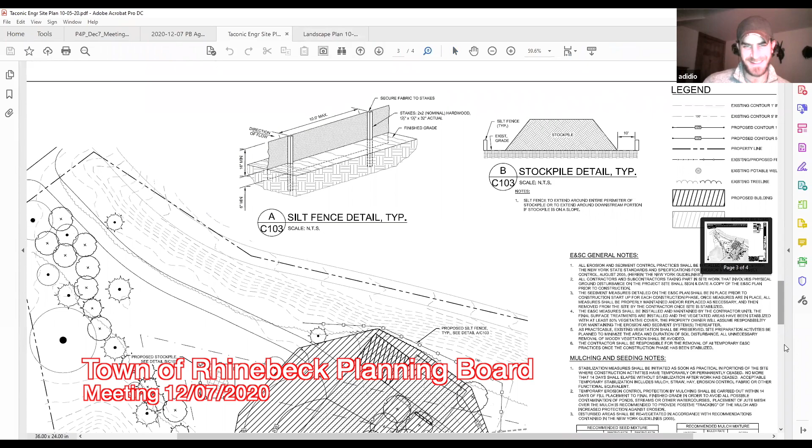I think this is the old site plan because it still shows the old one. Yeah, this is the old one I think. The new one will have a revision date of 11/20. Okay, well I know that was sent out to us. I believe we've all had an opportunity to see the new one, because I know you did send that out. Yeah, it looked kind of sparse to me, that plan.

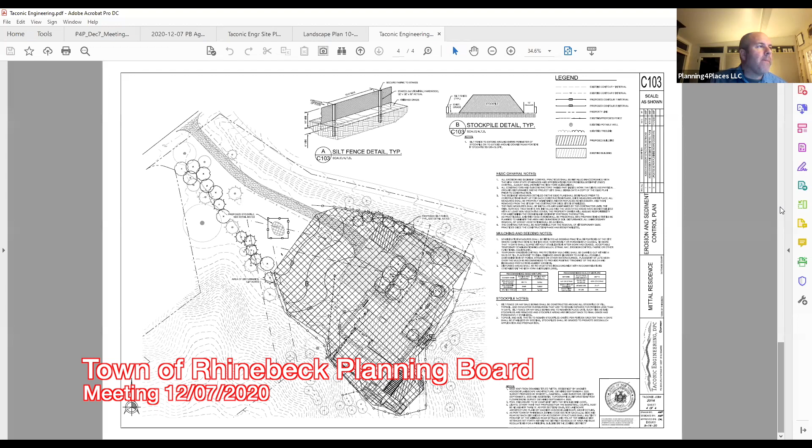Not sure. I have a couple files here. I can see if it's one of the other ones. Looks like it may have been submitted on or around the 23rd or 24th. I know it went to Ray Jurkowski on the 24th. Is this it? That is it. Yep, that's the new one. There it is, sorry about that.

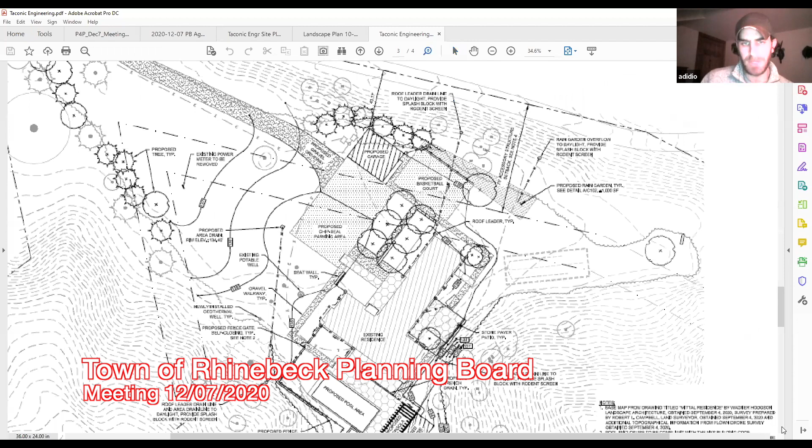No problem. So on this one specifically, you can see the barn or garage location with that shift gets it up on the flat, which the previous one did not appear to do. We're up on the flat with the garage now. You can see how it cut into the driveway parking court a little bit. Really, a shift any further would require a significant grade change and rerouting of the driveway.

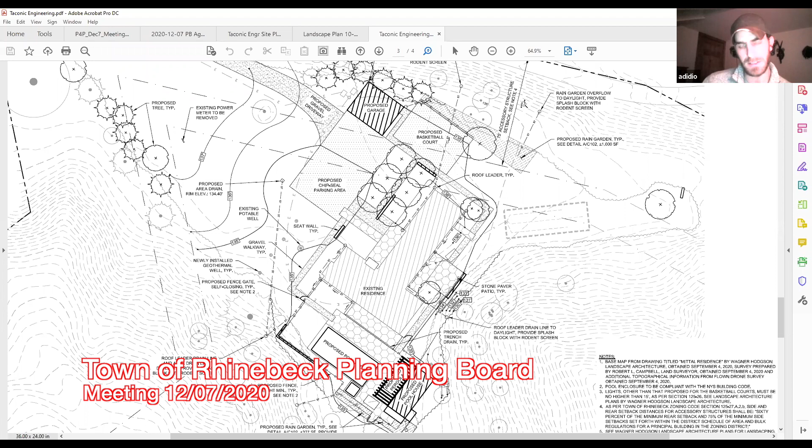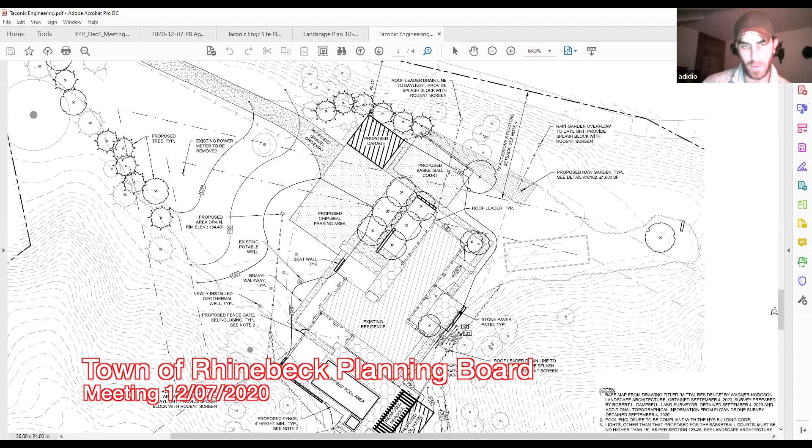On the north, behind the basketball court, there's a long strip of what will be rain garden area, just inside the tree line. There's a detail showing the ponding depth, sized to manage and house the entire 10-year storm, the full channel protection volume, which is in the neighborhood of 5 inches of rain in a 24-hour period. Then to the south, near the pool house, the rain garden is integrated into the plantings.

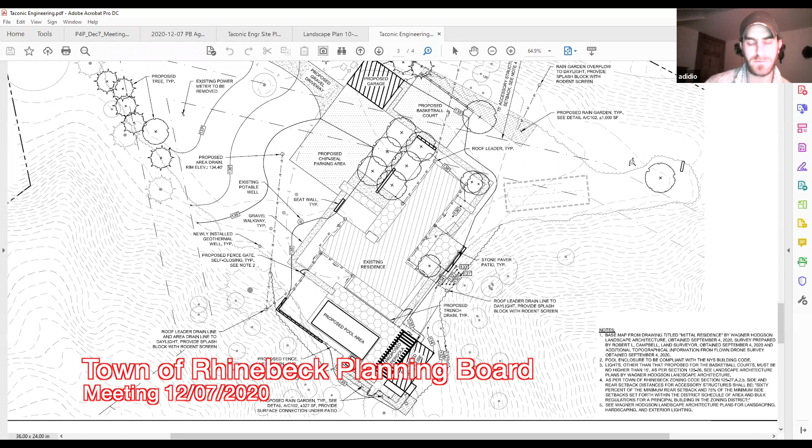Around the pool house patio area, it's almost a planted garden, but it'll act as the rain garden, so the roof leaders are directed there. There's a catch basin out front to allow water from the parking court area. Just to the west of that, near the corner of the parking court, there's a small yard drain that would daylight to the hillside. That's just standard site drainage.

From a site plan perspective, we updated our area of disturbance. Again, those roof leaders are shown, and the pool house. One minor thing, which Dale can chime in on, we did shift the spa, the proposed hot tub, to the pool. That was just a minor site change, no real implications otherwise.

Okay, any questions for Andy from members of the planning board?

I guess the only question I have, Andy, have you run this by Dave Pearson down at the Health Department so that he knows you've removed the bathroom from the pool house? I did, yeah. He and I had subsequent discussions about how the process would work if we tried to do it, thinking about various options, and we came to the conclusion that it just doesn't accommodate the water closet. So removing it, he said their involvement goes away because there's no exterior plumbing. We even talked about routing it through the house so we didn't need septic tanks and pump chambers, but he said any exterior plumbing modifications includes their involvement. So the applicant unfortunately decided they had to take it out. Okay, yeah, so Dave's on board.

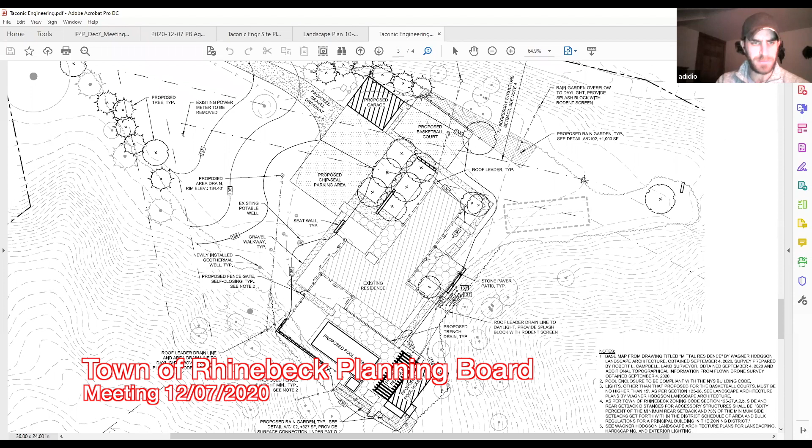Any other questions from members of the planning board? I don't know if you want to flip to the other items you were looking for, you could flip to the landscape plan. It's just updated commensurate to the site plan revisions. Yeah, well, let's have a look.

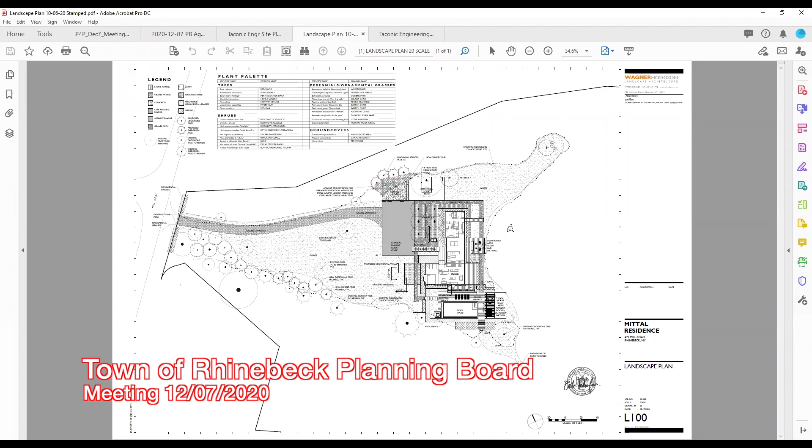Is that the right one? I don't think that's the right one. No, that's the older one.

Sorry, I have a whole bunch of files for you.

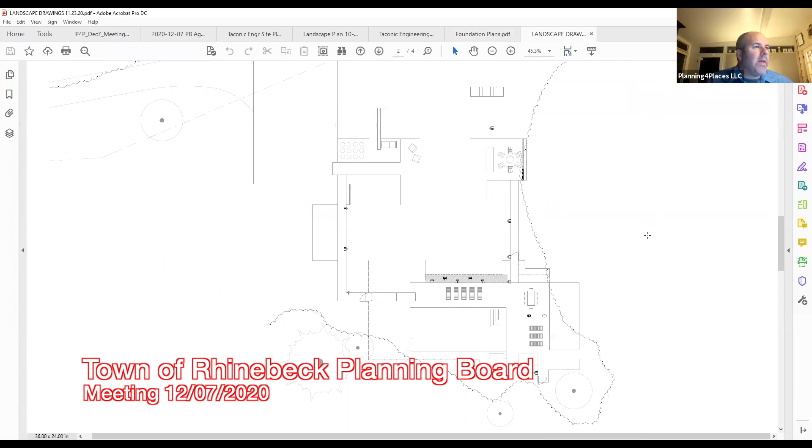Okay. All right, let's see. Excuse me, okay, I think I have the right set now. Is this the sheet, or a different one? That looks to be right. Correct.

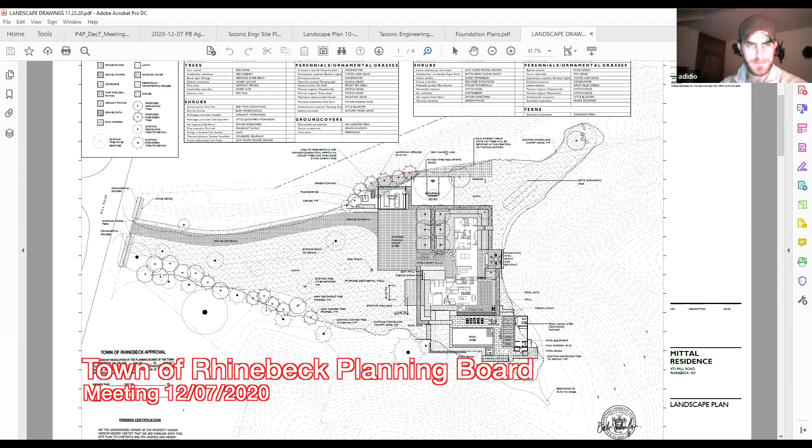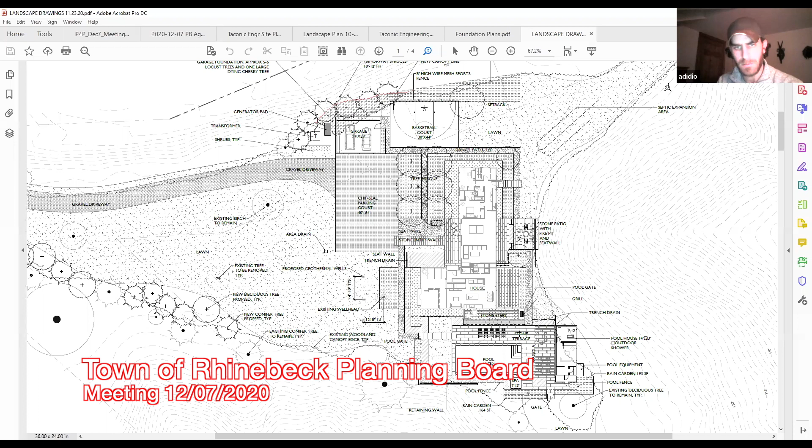Okay, yeah, this one says landscape plan. So this calls out the material selection and also shows the rain garden locations, some additional tree plantings on the backside of the garage, and it goes hand in hand with the site plan. It includes some of the drainage structures, like that catch basin out front, that sort of thing. So it's more about the surface and material selection than anything else.

Andy, it looks like it's still showing an outdoor shower on this plan. Let's see. Is that right? Am I misreading something? I'm not seeing that. Oh, right there with it.

It's the interior bathroom that we removed. We would still keep the outdoor shower. Okay, that's okay with the health department? Yes, that's my understanding. That wouldn't be plumbed to the septic or anything, so that's totally fine. It would be a rinsing shower—once you get out of the pool, it's not a lather-up soap shower. It's not unlike the outdoor showers you see at public pool facilities. It's just a rinse to get chlorine out of your hair, not an actual shower. It just runs over land, it's not a plumbed shower.

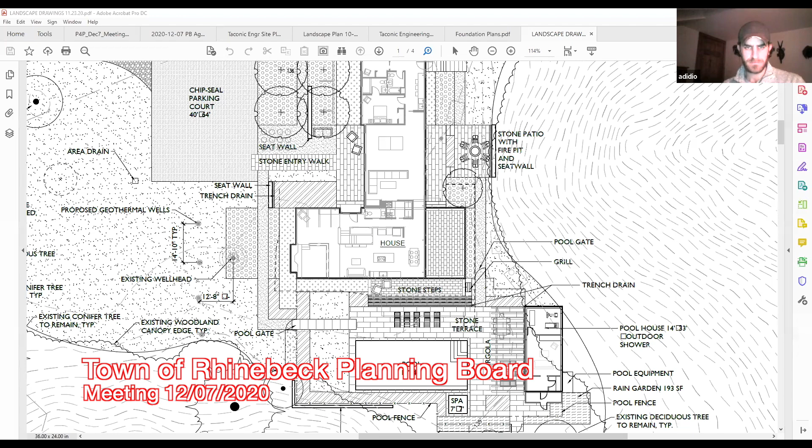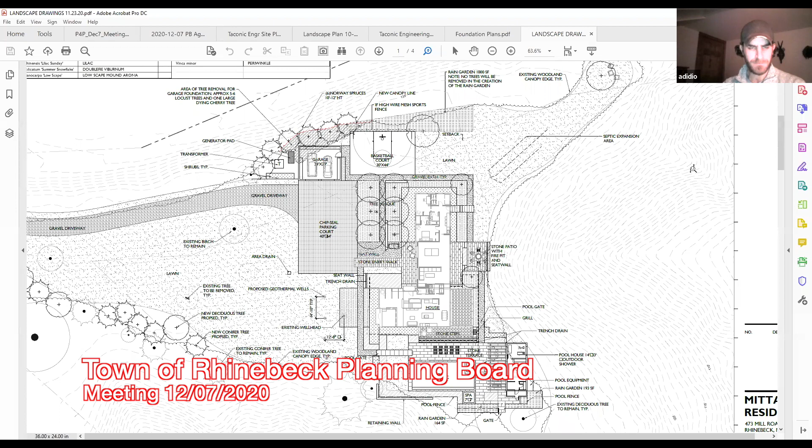Any other questions for Andy? I think the one last item, before we finish up, would be the rendering that Melissa provided. I don't know if you have the architectural drawings there. I'm not sure, it's labeled as pull tab design. Ah yes, okay.

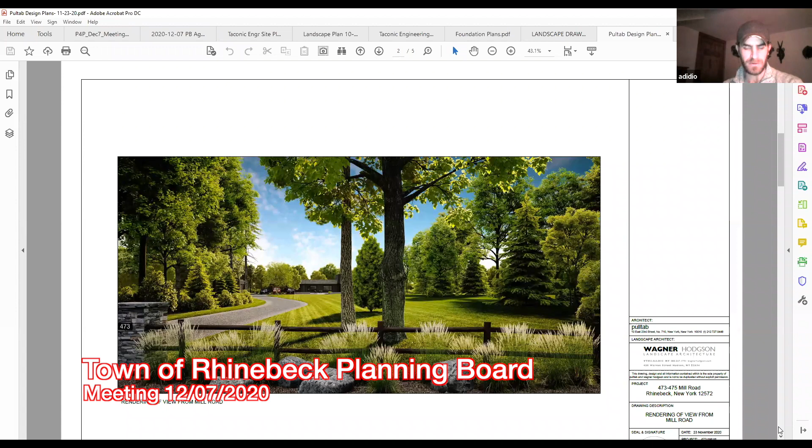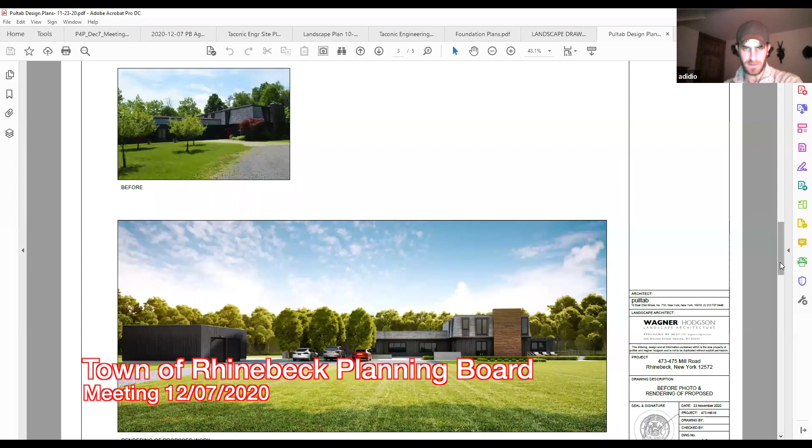There's an additional sheet that shows just the elevations without any of the landscaping, to give a sense of scale. Again, it's not exactly how it would really look, but that's the color rendering and architectural rendering so you can see what's there. I think you had that before—the additional sheets beyond that are just the actual architectural elevations with material selection, and the sample sheet showing the colors.

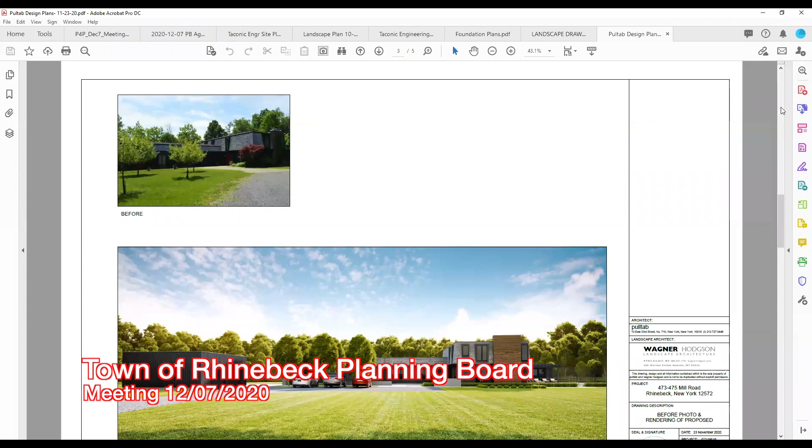That second sheet with the rendering from the road is really the new information. In this one, the existing trees have been eliminated just to give an idea of what it looks like without the trees, for a sense of scale. That other rendering is showing it without the trees to focus on the architecture. But the rendering we looked at previously from Mill Road—those few trees in front—are actually existing, so that's really close to what it will look like.

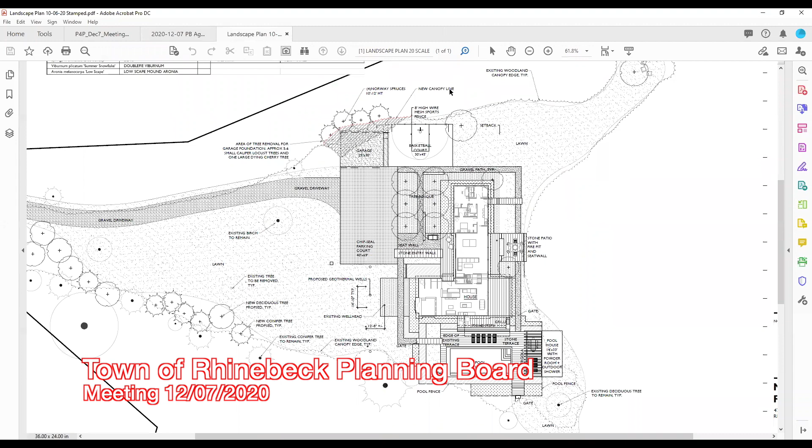Have you prepared, subject to the resolution from the Zoning Board of Appeals, a planting plan that we can append to both their approval resolution and an approval resolution from this planning board? Nothing beyond what's already been submitted.

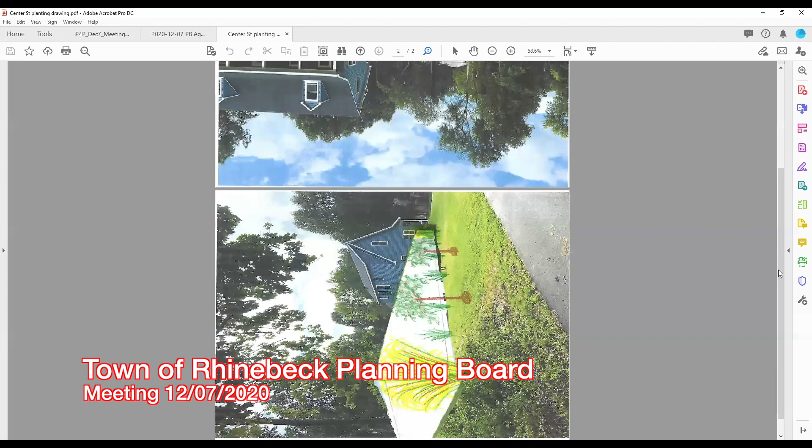Okay. Well, I think, do we have a copy, Jim, of what we already have? We're looking at it. Sorry, it should be up on the screen right now. Okay. Well, that's the fence, but that's okay. I think if you can sort of move this one along, Jim, so we can sort of, okay.

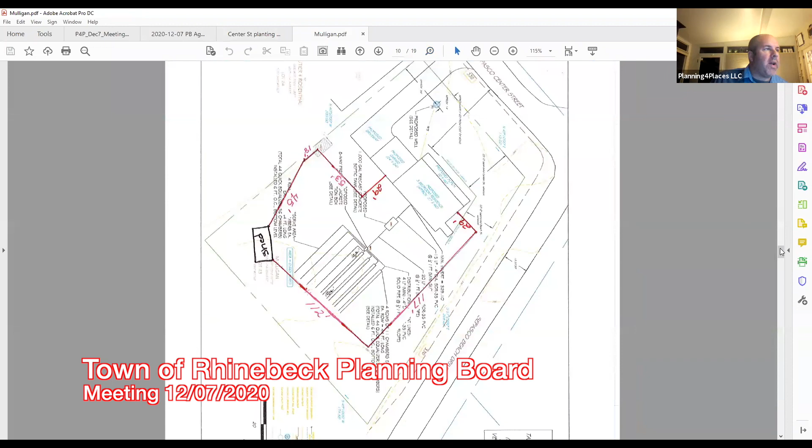So these were the planting drawings that we were provided, and then we have the plan packet that was submitted with the outline of where the fence would go, and then the renderings of what it would look like. Okay. I believe that's everything, that's what's been submitted. Okay.

Well, given what the ZBA is saying, they were referring to including grasses, dogwoods, forsythia, and lilacs. Is that what this drawing, the planting drawing, is showing? Are those plant species? Correct. Yes.

Okay. Because what I will have to do when I get your final site plan for me to stamp and sign is put a list with it of the plants, and probably also a screen capture if possible of your planting plan here to include with that, in order to satisfy the Zoning Board of Appeals requirement that they placed on us.

Do you have any questions about the plants that they're speaking about? No, not at this time. I guess one question I do have.

So if we go back to the conversation at the last meeting, since we have the 6-foot height variance set, if we go to a... I guess I don't know what the word is, the word's eluding me... if we go with the gap between the fencing, so we then would no longer have to do any of this landscaping on the outside, correct?

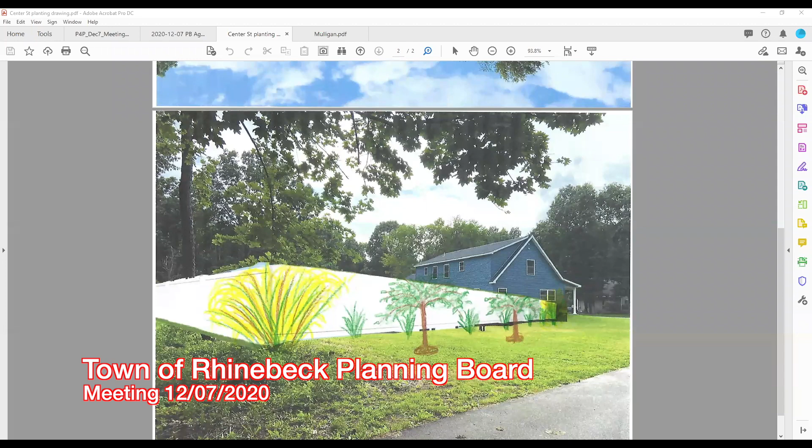So is that understood—basically Jeff is going to go speak to the ZBA, and we will continue this public hearing until January 4th. And then if he decides to proceed with the solid fence, we will discuss whether or not we wish to approve a solid fence. Does that make sense? It's fine with me.

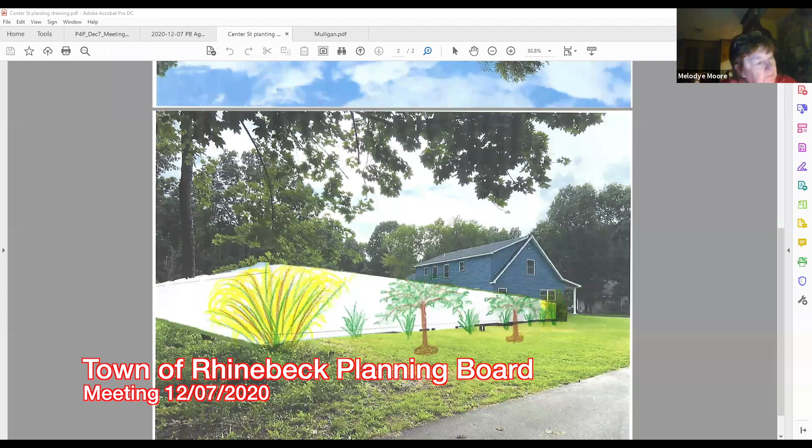Okay, what time on January 4th will we continue this to? 6:55. Okay, could I hear a motion to continue this public hearing until January 4th at 6:55, please? So moved, Melodye. Second, Kathy. Thank you. All in favor, please say aye. Aye. Aye. Very good, thank you.

And Jeff, make sure the ZBA understands that if you go to the non-solid fence, the planning board no longer has a role to play in any of this. Correct, yeah, I will let them know. Okay, thank you. Thank you.

Okay, we have a few new applications. The first one is Garden Homes on Route 9—it's the manufactured housing development on the east side of Route 9, just north of Williams. Is a representative here to present to us? Yes, I am.

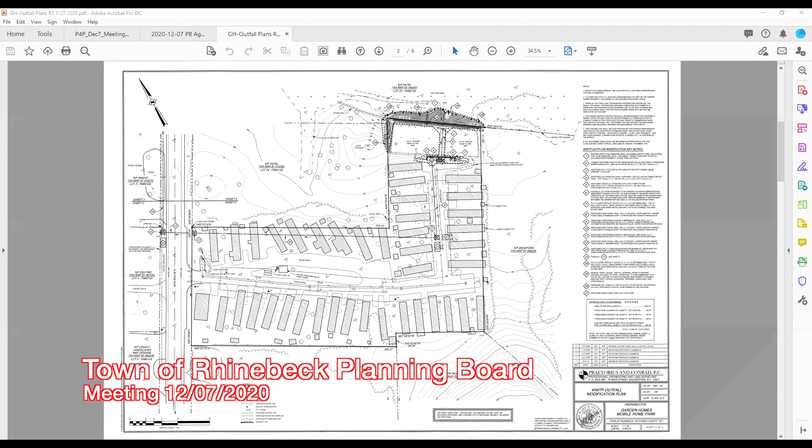Good evening everybody, my name is Brian Daley. I'm in-house counsel with Garden Homes Management. I want to give you a little background on what we're doing in the mobile home park on Route 9. I'm not going to belabor the extensive history, but we've been in litigation with the neighboring property owner for over a decade, and now have a court order requiring us to do certain things within the park—move a few encroaching structures and move the outfall of our septic system to a new location. About a year and a half ago we had discussions with the town, and the decision was made that we did not need any town approvals for this work.

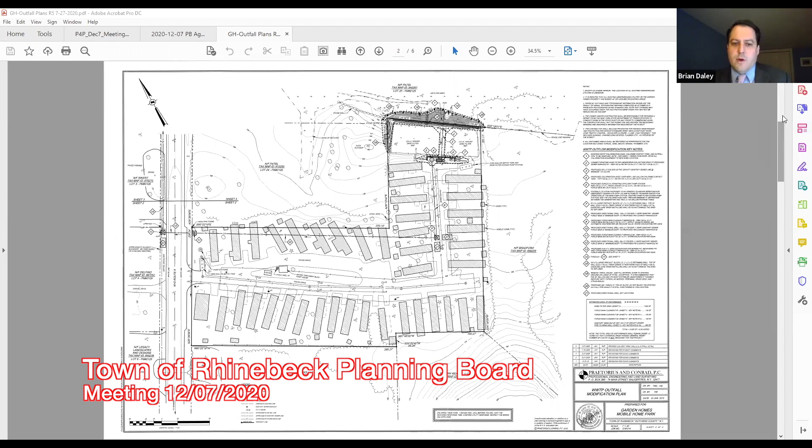It had been overseen by the Department of Health, DEC, and the New York Department of Transportation, because we need to go up Route 9 with the force main. We proceeded with the work within the park under the oversight of the various entities and have completed the majority of the work. What's left is directional drilling to run the force main under Route 9, up to the new outfall location near the corner of 9 and 9G. Yep, right there.

Our neighboring property owner challenged the decision that we didn't need town permits for some of this activity. Literally a week after we got the permits from the Department of Transportation to do the work, the ZBA issued a decision directing that we needed to get a wetlands permit and have our stormwater pollution prevention plan approved by the town engineer. So we've submitted the plans to you folks for the wetlands permit, and we've submitted the information to Mr. Drakowski for the SWPPP.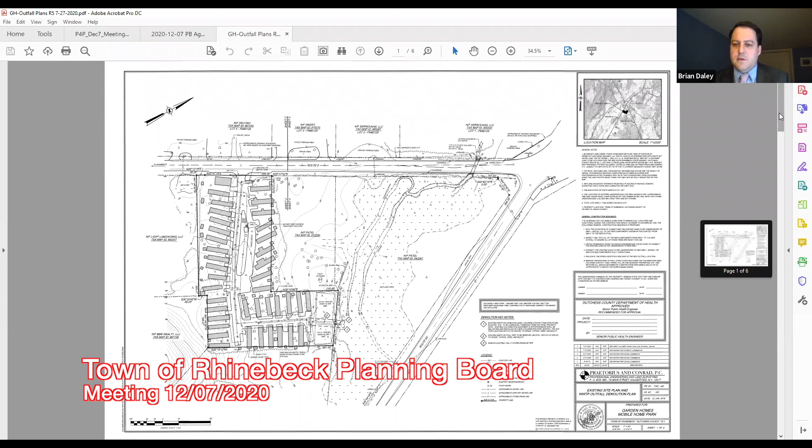To give you a sense of the work we've done, we've moved part of the sand filtration system back. We added a retaining wall, added some chlorination tanks, things of that nature, all in this area that Jim has kindly zoomed in on. We've done all the work at the top of this picture, and that work is essentially complete.

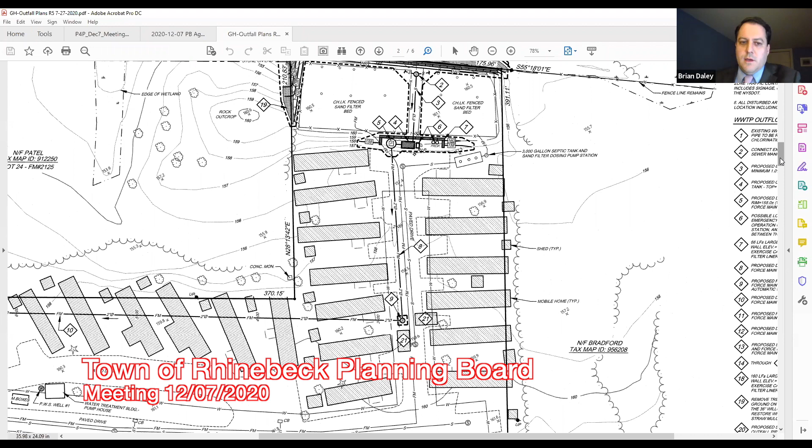The outfall continues in its current location where it has been for decades, and we cannot move that until the force main is completed to get to the new location. Once the force main is complete, we'll move the pipe out from where it is and run it — run the effluent through the park out to Route 9 and up the shoulder on the opposite side of Route 9 from the wetlands. So we're not in the wetlands per se, we're in the setback for the final piece of the work we're doing.

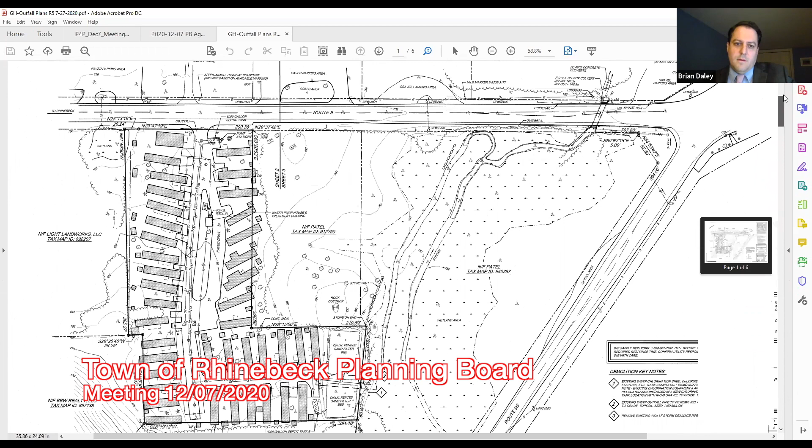If we go to the other sheet — thanks, Jim. If you zoom in at the end here, basically more or less where Jim has it, this is the part of the work that will occur in the setback area. Just to the right, as this picture is oriented, of utility pole 52496 — just to the right of that, we'll be setting a manhole and running the force main.

One of the issues we ran into is the Department of Transportation — I apologize if you can hear the sirens in the background. The state actually thought its right of way on this road was 6 feet wider than our research showed. As a result, they lost essentially 6 feet on the side of the road we're on, which meant we could no longer get on the other side of the cement wing wall on the culvert without going onto private property owned by the Serroukas and Vaniciotis families.

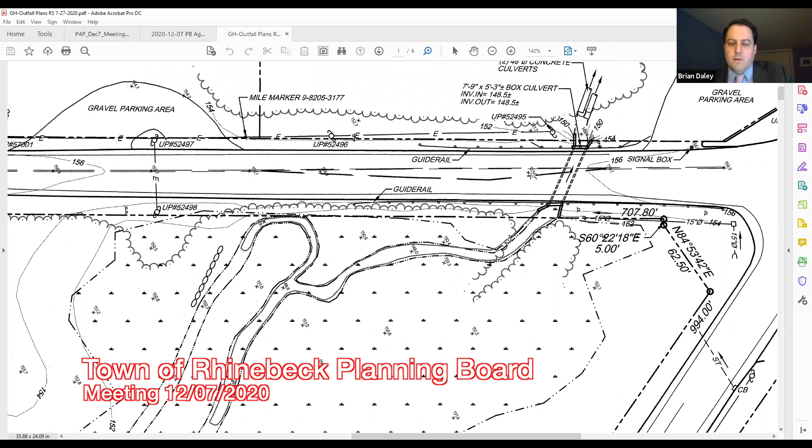So we spent probably a month and a half confirming that, in fact, the right of way was narrower than the state thought, and another two months reaching out to the Vandakiotis and Serroukas families, as well as another entity which owns property behind the Rikert property — Astor Rhinebeck Associates owns a very large property back there. We reached out to their attorneys to see if we could come up with a private easement to resolve these issues. They told us no multiple times, and we couldn't get a response from other people.

So in order to preserve these 40 homes for our tenants, many of whom have been living there for 30, 40 years — we've owned the parks for about that long as well — we need to do this work and reroute the outfall. We've already gotten DEC, Department of Health, and Department of Transportation approvals and permits. Our expectation, weather dependent, and obviously this time of year that's a tough call — with the directional boring, freezing is an issue — but if the weather cooperates, our expectation is we can probably complete this project within about 4 weeks from when we finally have all of our necessary town approvals.

My understanding also is that the SWPPP has already been accepted by DEC. I know that Ray's looking at it for us as well; the last thing I heard from him, he didn't see any issues with it. I think that's been satisfied for this from both DEC, DOT, and whatnot.

If I'm correct, the wetland we're concerned with is on the south side, the east side of Route 9. Basically there is no wetland on the west side, but there is the buffer — we have a 100-foot buffer going from the wetland from its edge. That's why the wetland permit is required, to work within the buffer to put in the manhole cover and the extension for the outfall. I think that's what we understood it to be. That's correct.

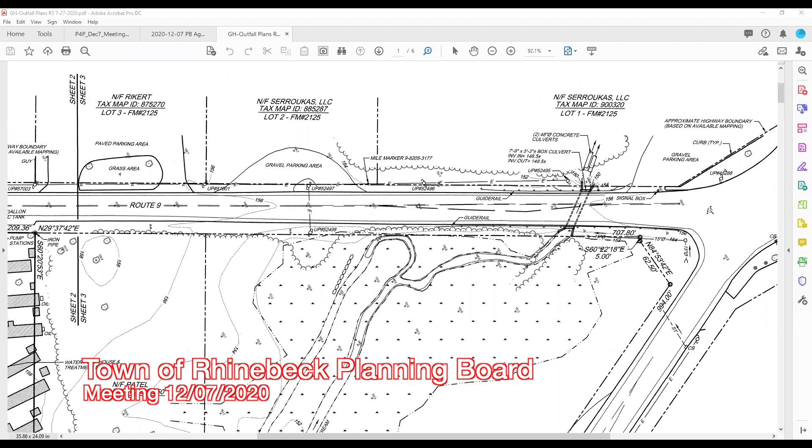I'm going to defer to our engineer who's also on the call for the specifics, but as you're aware, DEC has standard regulations that the outfall must meet. We have to treat it. It goes through sand filtration. It gets chlorinated, and it has to get dechlorinated in order to be safe for the wildlife and all of that. There are requirements for monitoring, which we comply with now.

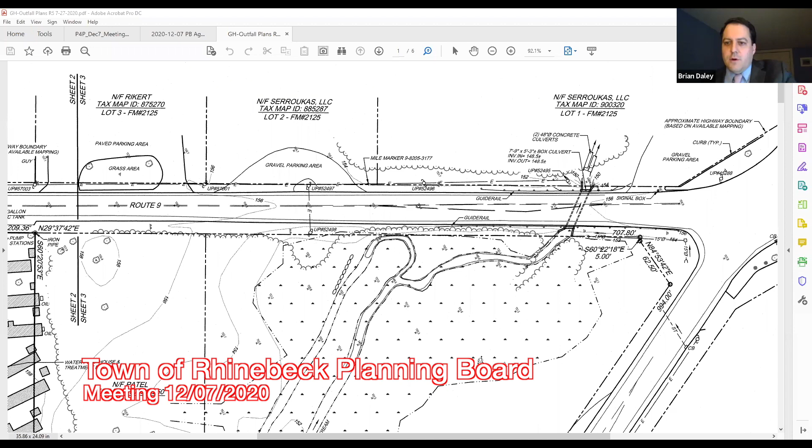Essentially, the water is going to flow to the same location it has been flowing for decades. We're moving it from one tributary of the Rhinebeck Kill just downstream a bit. There's no increase in volume, no real change in anything other than where the pipe actually feeds into the stream.

But if you'd like specifics about the requirements, we do have our engineer also on the meeting. I would be interested to know it. I'm sure there are experts who have looked at it. If any residents are tuning in, it might be of interest to them to know that what's going into the Rhinebeck Kill is going to be safe and not polluted. Correct, it's safe for the wildlife and it's safe for human beings, because this issue did come up.

The way we resolved the issue with the DOT, they ultimately gave us permission to core through the wing wall, provided we posted a bond that if and when they need to work on that wing wall and condemn a bit of property to extend the right of way, we will move the outfall. One of their concerns was, if we have people working in the culvert, is this safe? So we provided them with all the information from DOH and DEC, and they were satisfied that this is safe, not only for the wildlife, which is obviously a preeminent concern in this area, but also for any people who might be working for the DOT in the culvert.

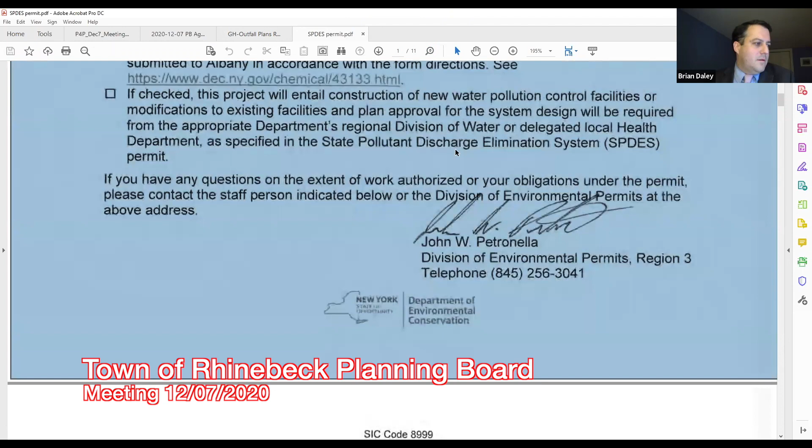Yeah, if you have the SPDES permit... is this the right one? That's the one. So if you look on it, it tells you all the parameters of the processing and the monitoring requirements, and the monitoring of pH and temperature and concentrations of various levels.

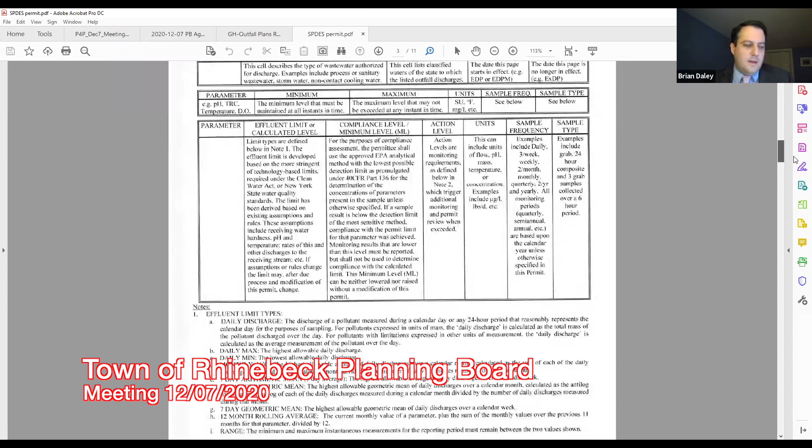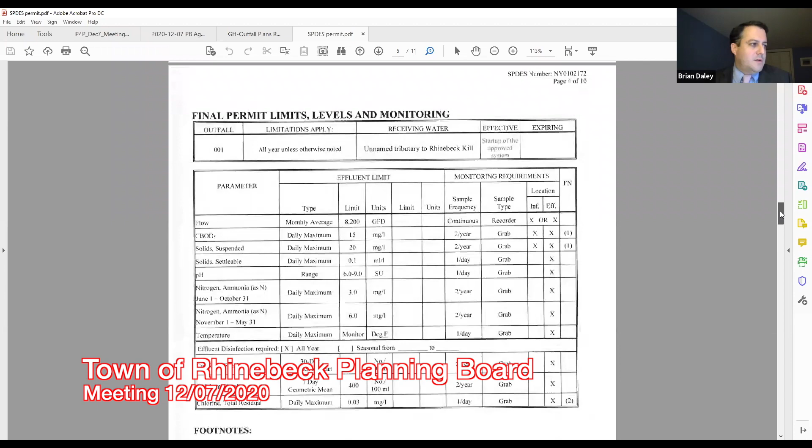And then if you go on page 5 of the 11-page PDF, you'll see we have to track the monthly average flow and various matters. Since it's a septic system, we have to track solids, pH, nitrogen, temperature, two different ways of measuring fecal coliform, and total residual chlorine, which is designed to make sure that there isn't too much chlorine in the discharged water so that it doesn't negatively impact the flora or fauna or anything else. On the next page there are additional similar categories.

And I think those are the parameters to the SPDES permit. Yep.

Brian, I don't know if you want me to address the water quality here. I understand we just went through the SPDES permit parameters, but I don't know if the moderator clicks me on or I just clicked on mute. Apparently I'm unmuted, so... We can hear you, Rich. All right. Start my video. Okay, I can do that. There you are. Well, now everybody's scared.

Did that answer your question on the water quality, or do you have more? It answered my question. I think it's very helpful. Thank you very much. Oh, well, Brian did it all.

Okay. Thanks, Rich. Do we have any other questions for the applicant?

Okay, well, I have a resolution to read. The Town of Rhinebeck Planning Board hereby acts as follows on the application by Garden Homes for a wetland permit approval under Township Chapter 120 for relocation of a septic outfall pipe located on Route 9 within the neighborhood residential and crossroads business zoning districts. We accept the application and supporting documents as adequate for further review by the planning board, its advisors, and the public, and we classify the proposed action as unlisted under SEQR, for which coordinated environmental quality review is precluded. We are going to schedule a public hearing on the application for December 21st at 7 p.m. and direct the clerk to undertake or otherwise cause noticing and posting thereof.

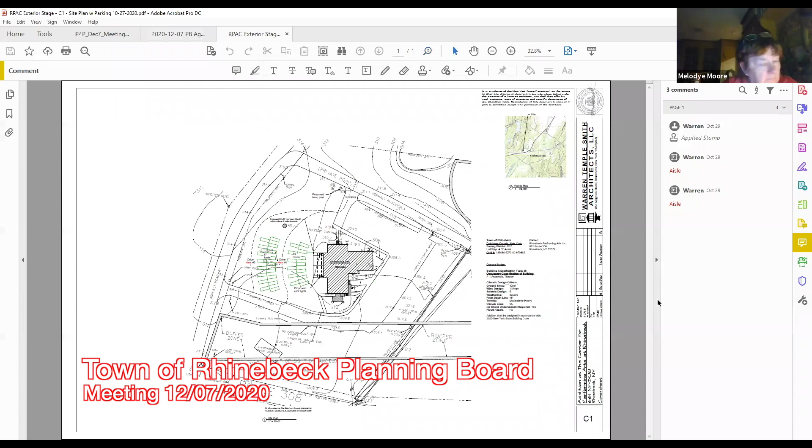So as you all know, the Center for Performing Arts has been trying to keep things humming along in the current circumstances and erected a ground level exterior stage sometime in the summer or fall, and decided that it would be a good idea, even after we can gather indoors again for theatrical performances, to have an exterior stage for summer use. I don't know that they'd ever have two performances at one time, but it's an alternative to the indoor theater, and at the moment it's sort of essential. So after several iterations, they decided that they'd like to rebuild the stage up a few feet off the ground and to put a roof over it, not enclose it, but at least have some protection from rain and so forth. The thought is that people could watch performances in their cars, fanned out on the lawn, the field, really to the west of the theater.

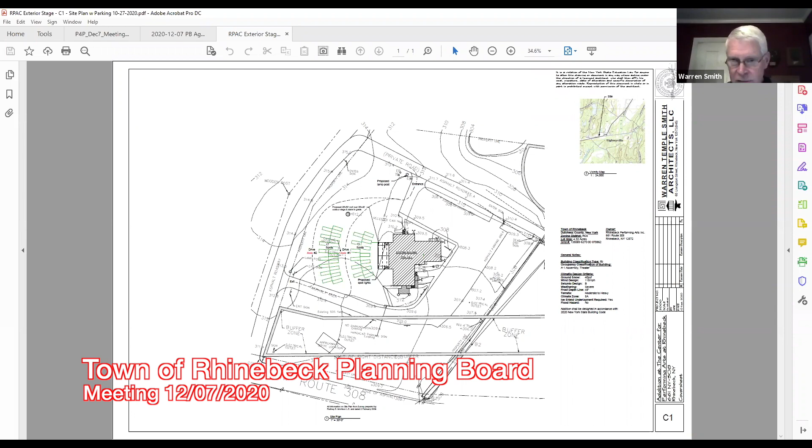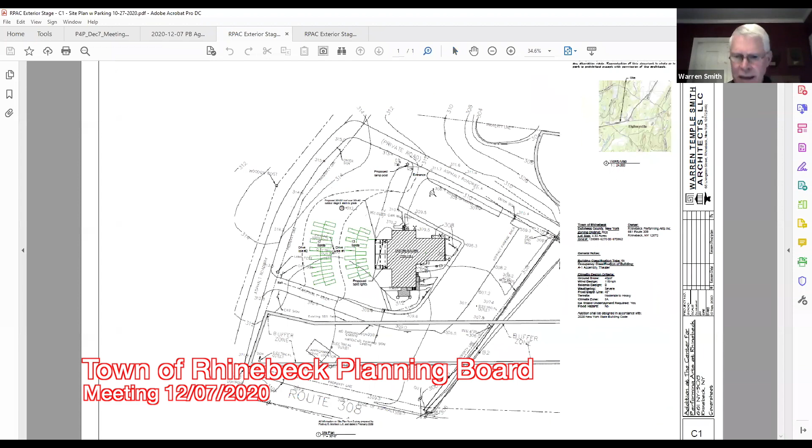They would actually receive via Bluetooth in their vehicle audio system audio of the performers, and they'd be looking perhaps with field glasses from the back row to see people on the stage. But this is a creative effort for the Performing Arts Center to find a way to continue to give performances as the weather gets cooler and less conducive to outdoor activities. Initially, they had people sitting on the lawn, but apparently that didn't meet health department requirements, and now we're really not in lawn sitting weather. So this is something that was initially proposed as a means of dealing with the pandemic, but their thought is, we're going to go to this trouble, they'd like to be able to use it in summers to come.

So this site plan shows, again, the concept of how this would operate, be located and operate. It's not increasing traffic on the site because they would be doing this outdoors when they aren't doing things indoors. So it's an alternative venue. And the soil type, actually, as we went back and researched when the site was initially developed, is a gravelly type, actually appropriate for parking cars. There was some concern about people getting stuck in the mud, but it doesn't actually get particularly muddy there.

And so this is, again, a site plan showing how it would function. All traffic would come in. The current entrance road would go to the top of the road that ends in the cul-de-sac at the residential area, turn in onto the lawn, and then exit at the bottom road.

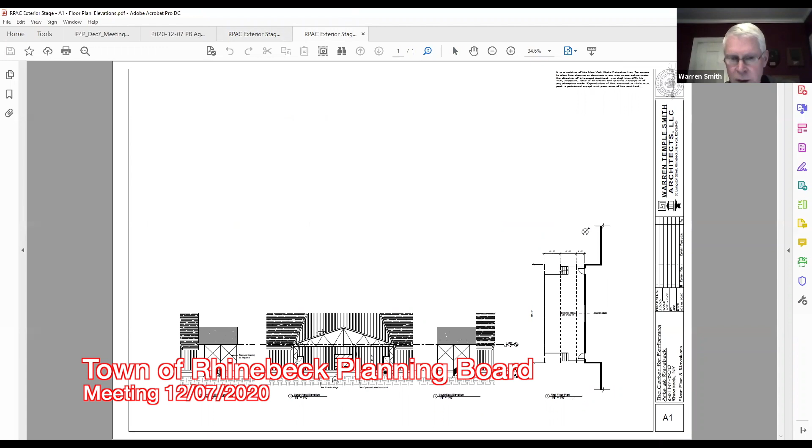Just about everybody pre-purchases their tickets online and shows that, or their smartphone, to people as they check in. If anyone didn't pre-purchase tickets and there were still spaces available, they would drive to the second entry at the top of the Performing Arts Center and go through a ticket purchase protocol there. This is the site plan, and the other drawing Jim had up briefly is simply a plan elevation and section of the proposed stage and the open truss covering that would form a roof, open on three sides. That's the gist of the proposal, and I'm happy to answer any questions.

Warren, have you discussed this with Michelle, the zoning enforcement officer, in terms of whether the parking regulations for the town apply to this, since you're basically talking about a temporary situation rather than a permanent parking area for a facility?

Yeah, as I'm sure you know, we don't have a definition of seasonal parking. We haven't had to deal with this before, I guess is what I'm trying to say.

Have you spoken with her about which, if any, of the parking regulations in terms of spacing, positioning, screening, things of that sort would apply to this? Does she have any comfort level with this definition of seasonal parking, which might not require following those parking regulations?

So I've had several discussions and email exchanges with Michelle. She was comfortable with this entire plan. Bear in mind, this parking, which is in staggered rows to provide views of the stage, is only for the duration of a performance. It's not like a parking lot where people are leaving cars for long terms. She did not have any particular concerns about this approach and felt that we should proceed, subject, of course, to approval by the planning board.

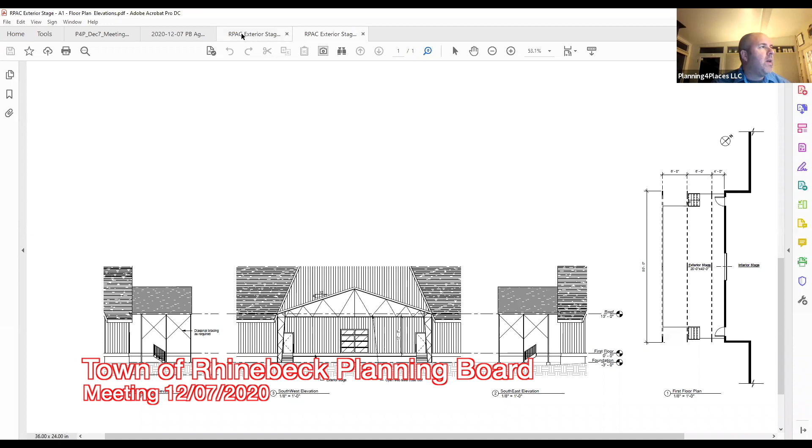But a couple things I found, I just wanted to bring to your attention right now. A few of the spaces, if we're looking at this, assuming that some of the parking standards are required for any of this, then a couple of these spaces fall within 50 feet of the property line, which is not supposed to happen based on the code. But again, I'm not clear this is a parking lot, so I'm not entirely clear if those standards need to be referred to or not.

And the same goes for any kind of buffering requirements. It's not a parking lot. It's obviously temporary and for use with this outdoor stage. You're not doing anything to the ground. But those are two items I identified. I'm just not exactly sure how to deal with those. Maybe you can talk with Michelle and figure out if that's an issue or not, and if not, then that's fine. Again, I know you're not doing anything to the ground. I just want to make sure that what we do is consistent with the code that we have to address.

But this is certainly a unique situation, and you'll get a copy of my memo notes, so you can see what I wrote. Sure. You talked about the grass issue, reinforcing the grass and things like that, so I won't go through that one.

One of the concerns I did have is about the wellhead that's on there. I didn't see any proposal, and I don't know what's out there now. I couldn't see it on an aerial. I didn't see anything that would help protect that from someone parking on it or near it. I don't know if there's anything sticking up out of the ground, or if it's just a cover that's flush to the ground or not. Just want to make sure that we don't have any issues with vehicles sitting on the well.

Is there anything sticking out? Did we discuss that with the operators of the Performing Arts Center? We know we need to provide something to protect it from somebody running into it, certainly. Okay, so there is something sticking up there. Yes. Then my only other comments really pertain to just the use of this space.

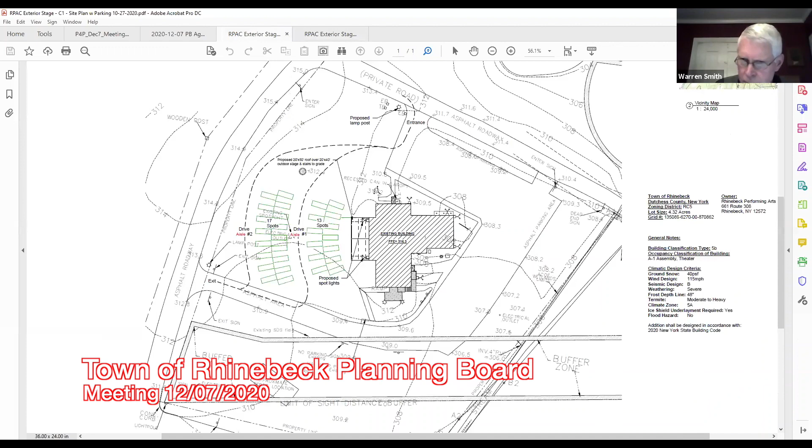The only other comment I had was about the proposed two spotlights. It looked like they were proposed to shine out from the stage into the lawn. Is that true? No? Okay, no. But we can note what they are. I saw that - these two right here.

Just wanted to make sure, if we're doing that, that we're taking into account any off-site lighting, consistent with our lighting standards. And then the last comment was related to hours of operation, because we do have residences around here, so just a discussion of whether or not we want to put a note as to what the hours of operation would be, just so people know what's intended.

So more questions than anything else, I guess. No, that's very helpful. Just want to make sure we're checking all the boxes here. Michael, that's it for me. Okay, thank you. Jim, any other questions from anyone?

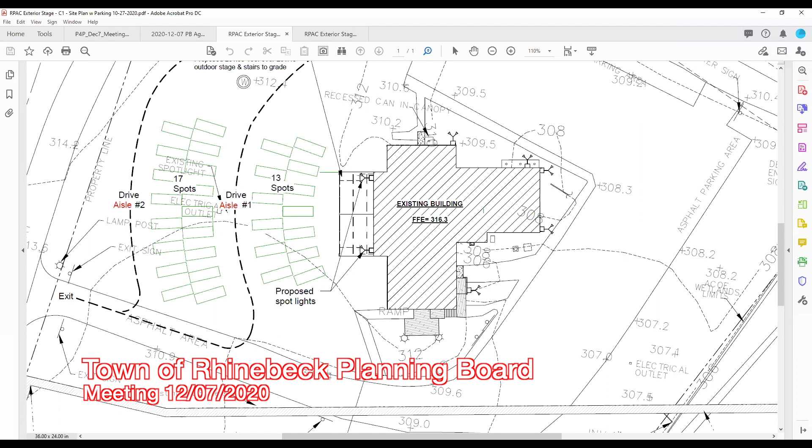Okay, I have a resolution then. The Town of Rhinebeck Planning Board hereby acts as follows on the application by Rhinebeck Performing Arts for site plan approval under Town Code Chapter 125, construction of an outdoor stage, stage roof, and other associated site improvements at 661 Route 308 in the RC5 zoning district. We accept the application and supporting documents as adequate for further review by the planning board, its advisors, and the public, and we classify this action as Type 2 under SEQR. We're scheduling a public hearing on the application for January 4th at 6:35 and directing the clerk to undertake or otherwise cause noticing and posting thereof. Delegating planning board members.

Well, I'll go take a look at this. Who would like to join me? Delise will go. Thanks, Delise. Yep, I'll go. Kathy - too late, I'm already going. You'll have to go to another one, darn.

To conduct a field visit to the project site and report their observations at the time of the public hearing. In accordance with Town Code Chapter 9, we will refer the application to the Conservation Advisory Board for review and written comment concerning environmental factors. In accordance with the Dutchess County Department of Planning and Development 239 Planning Zoning Referral, we refer the application to the Dutchess County Department of Planning and Development for review. We authorize, without prejudice to any information or comment that may be presented at the public hearing or may arise based on both the above cited field visits and referrals, preparation of a working draft of an approval resolution for the planning board's consideration on January 4th, or as may be later timely.

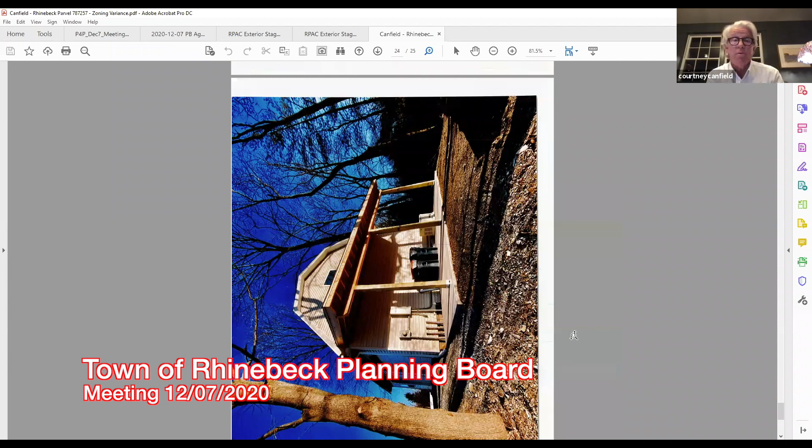Yes, I just completed a significant renovation on my home here on Rhinecliff Road. In the course of doing that, we added a small lean-to roof off the side of the garage and didn't realize it was not properly permitted with the rest of the project. It's basically just the foundation you see there—3 piers under that, 3 beams and a rafter, and an asphalt shingle roof. Just a small shed roof.

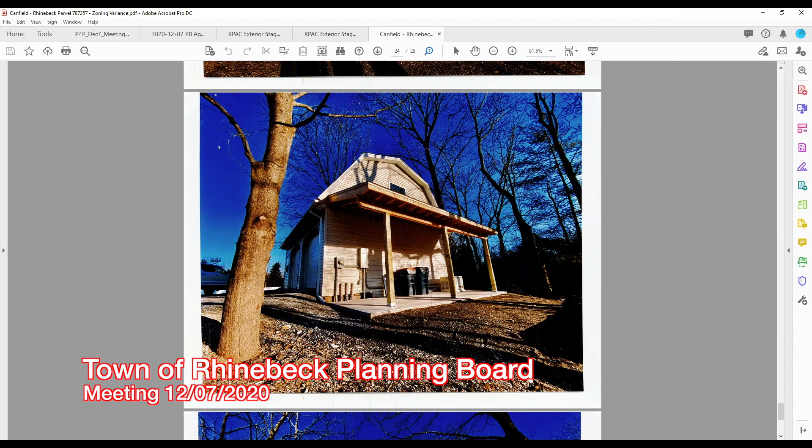I've been to pre-planning, and it's also gone to Michelle, who looked at it in terms of any variance or anything required, and deemed that it does not necessarily need one. Okay.

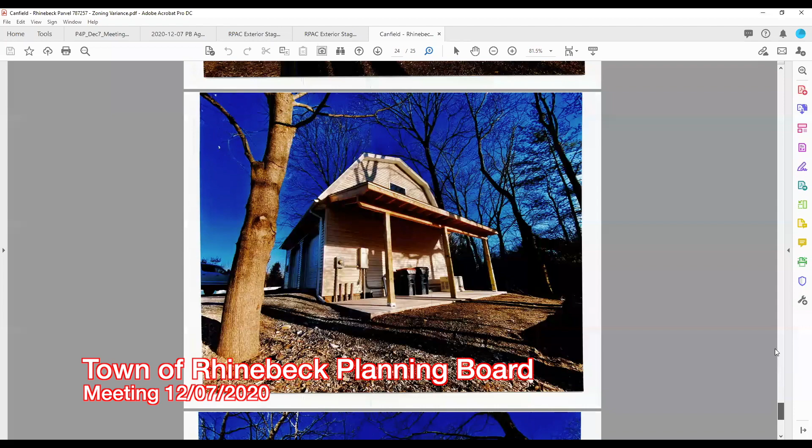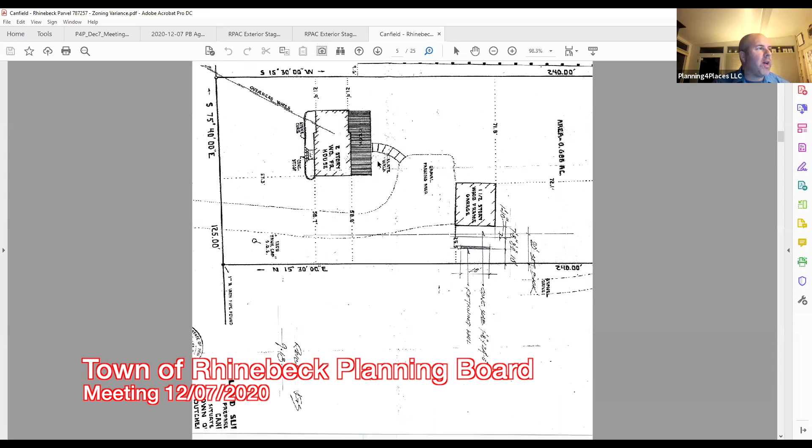Any questions for Mr. Canfield? Jim, did you have any comment you wish to make? Just one quick question for you, Mr. Canfield. I saw on the plan here—let me rotate it around, give me one second—the only thing I noticed on the plans that seemed to be drawn on here, I don't know if that was done with this project or something else, was the retaining wall. Off the edge of this.

Was that existing or is that new? No, that was put in as part of this, just to control the drainage. In the past it kind of ran down there, so what I did was put some of those temporary concrete blocks in, put some drainage in behind there, had new topsoil brought in, and then seeded it. It's to prevent any runoff.

Okay. Thanks. Yes, sir. I think that's honestly it for me, Michael. Okay, thank you, Jim. What's the setback there? The setback is about 19 feet from the property line.

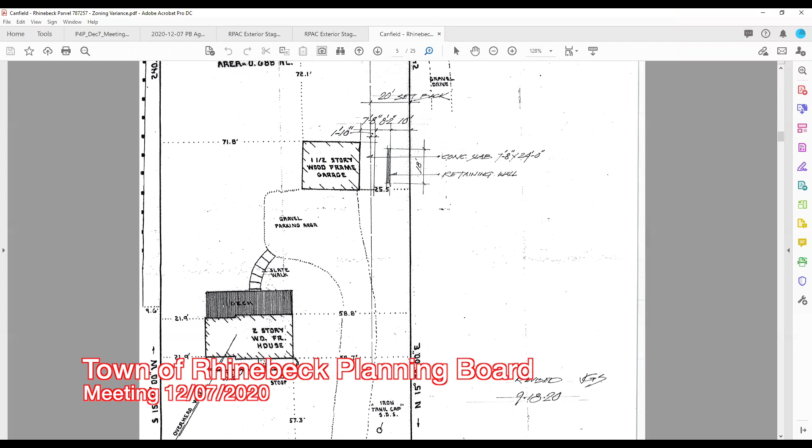Yeah, Michelle wrote a determination stating that a variance wasn't needed, even though we did have that listed in the application originally, in the paperwork we have in front of us. Any other questions from members of the planning board?

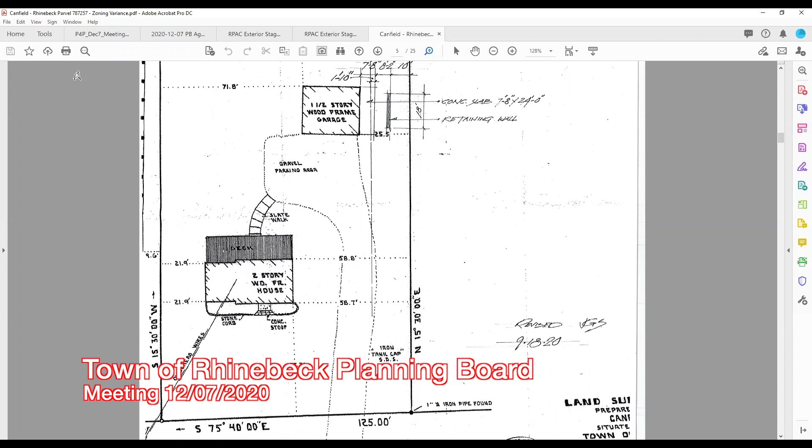Okay, well, I have a resolution. The Town of Rhinebeck Planning Board hereby acts as follows on the application by Courtney Canfield for site plan approval under Town Code Chapter 125, construction of an addition to an existing garage at 260 Rhinecliff Road within the RM1 zoning district. Accept the application and supporting documents as adequate for further review by the planning board, its advisors, and the public. We're classifying the proposed action as Type 2 under SEQRA. We're scheduling a public hearing for the application on January 4th at 6:40 PM and directing the clerk to undertake or otherwise cause the noticing and posting thereof.

We're delegating planning board members. I'll go, Sharon. Thank you, Sharon. Who would like to join Sharon on this? I will join Sharon. Thank you, Edna. To conduct a field visit to the project site and report their observations at the time of the public hearing.

In accordance with Town Code Chapter 9, Conservation Advisory Board, refer the application to the Conservation Advisory Board for review and written comment concerning environmental factors. In accordance with Town Code Chapter 118, Waterfront Advisory Committee, refer the application to the Waterfront Advisory Committee for review and written comment concerning consistency with the LWRP. And in accordance with the Dutchess County Department of Planning 239 zoning referral, we refer the application to Dutchess County Planning and Development for review. We authorize, without prejudice to any information or comment that may be presented at the public hearing or may arise based on the above-cited field visit or referral, preparation of a working draft of an approvals resolution for the planning board's consideration on January 4th, or as may be later timely.

Could I hear a motion to approve, please? So moved, Edna. Second, Sharon. All in favor, please say aye. Aye. Aye. Very good, all righty. Sharon and Edna will be getting in touch with you about scheduling the site visit. Very good. Thank you so much. Thank you.

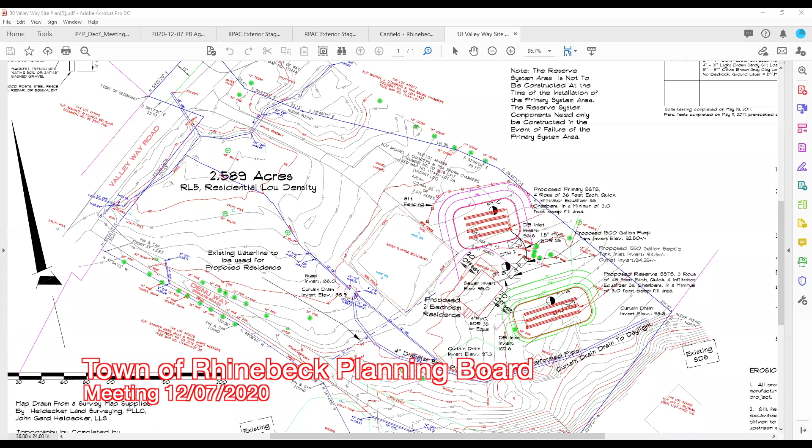Any other questions for the applicant? Jim, did you have a question or two? Yep, so I did have a couple questions. Let me see if I can go through them in a logical order here.

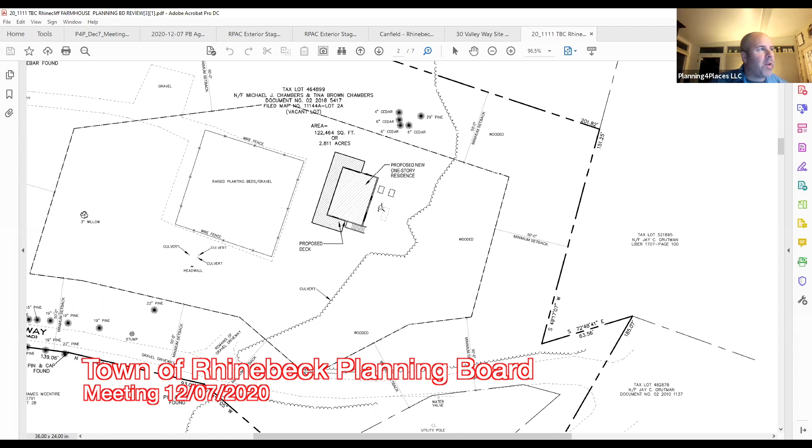So I saw on this sheet, where you're showing the proposed residence and the deck, there are these 3 boxes out here that I didn't see on the topography map or the existing site plan. I just want to know if that's something that needs to be labeled or what that might be. Those are the proposed air conditioning units and a potential future backup generator. Oh, okay. Can you put a label on that just to note what they are for the future?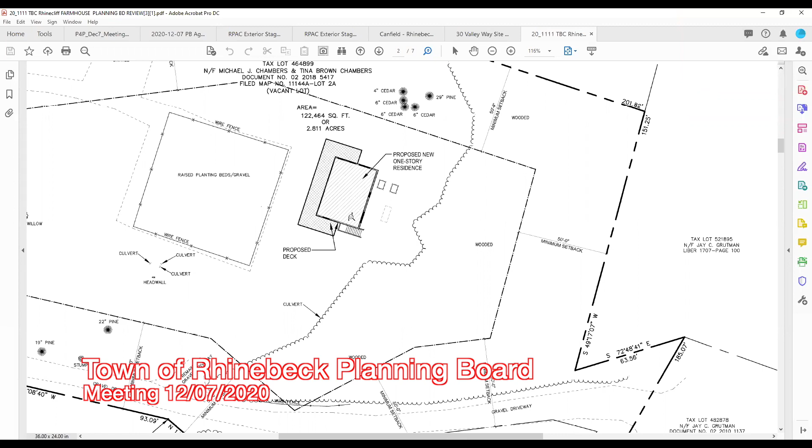Cal, is there any way you could put a bulk table on here, just detailing the measurements? We're in kind of the Rhinecliff area. I think you meet all the setbacks and coverages, but being a smaller site, it'd be good just to have the numbers on there—what the requirements are, just alongside what you're actually showing. Absolutely, coverages and things like that.

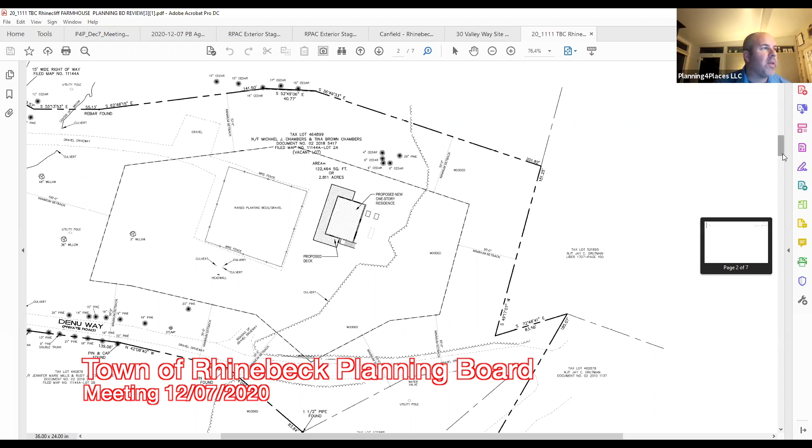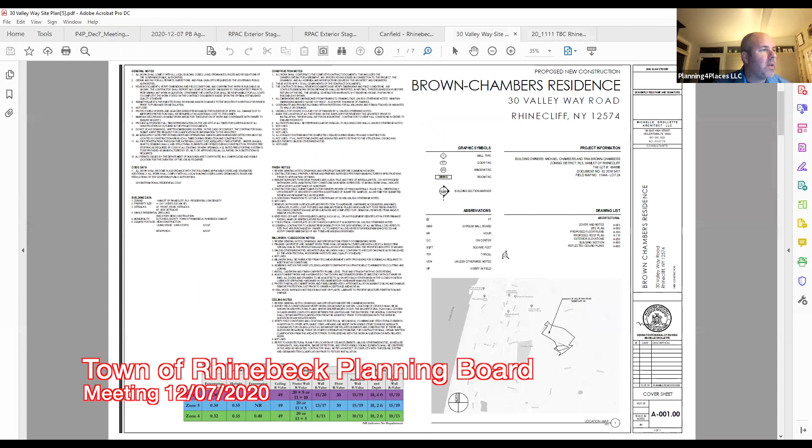And then I have 2 questions. The first one, let me see if I can find it—I think it was in this plan set. You showed a 4-inch pipe going into the woods in the rear of the property, I believe. I'm not sure which plan that was on. Oh, this one right here, this is the 4-inch perforated pipe that appeared to be going through the woodlands back there. I was just curious if you're planning a lot of tree clearing for that, or if it's just going to be cut and dropped in.

Yeah, as my understanding in speaking with David Ryder, the engineer, about this—this really is more or less a curtain drain, French drain. So we're just going to be selectively trenching through the woods to provide this drainage. It should not require any major excavation or tree removal. Certainly, the chambers would not be in favor of that. Okay.

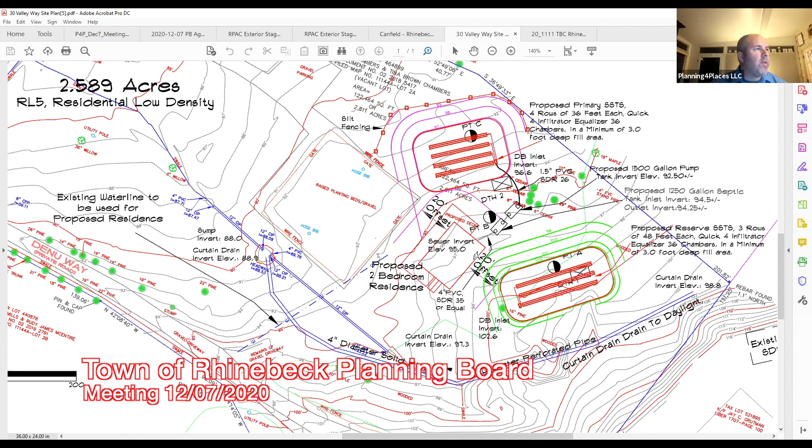Sounds good. And then the only other question I had was actually regarding the basement, the walkout basement stairs. I didn't see anything related to any kind of grading change to put the stairs in. Is there a grading change that's going to be needed? Because if so, we'd probably need to show that on the plans. But if the grading isn't going to change, or it's part of the original digging for the foundation, then maybe it's not necessary. I was just wondering if you could clarify what the plans are for those.

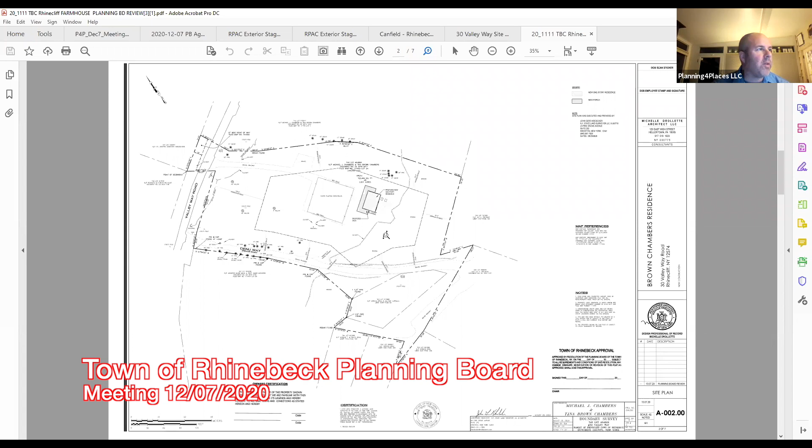Sure, we can certainly take a look at that. The land is actually pretty flat where we've located this home presently. But yes, absolutely, Jim, if it looks like we're going to need to do that, I'll talk with David about that as well. Okay.

I think, Michael, that was it for me—just a couple of questions and clarifications. Thank you. Thank you, Jim. Any other questions for the applicant?

Okay, well, I have another resolution. Town of Rhinebeck Planning Board hereby acts as follows in the application by Michael Chambers for site plan review and approval under Town Code Chapter 125 for construction of a house at 30 Valley Way Road within the RL5 Residential Low Density Zoning District. Planning Board accepts the application and supporting documents as adequate for further review by the Planning Board, its advisors, and the public, and classifies the proposed action as Type 2 under SEQR.

We're scheduling a public hearing on the application for January 4th at 6:45, and we're directing the clerk to undertake or otherwise cause noticing and posting thereof.

We're going to delegate Planning Board members who hasn't had an opportunity to go on a site visit. I'll go. Melody? Sharon? I'll go. I'll go. Sharon and Melody? No, Sharon and Kathy. Sharon and okay, Kathy, okay. To conduct a field visit to the project site and report their observations at the time of public hearing.

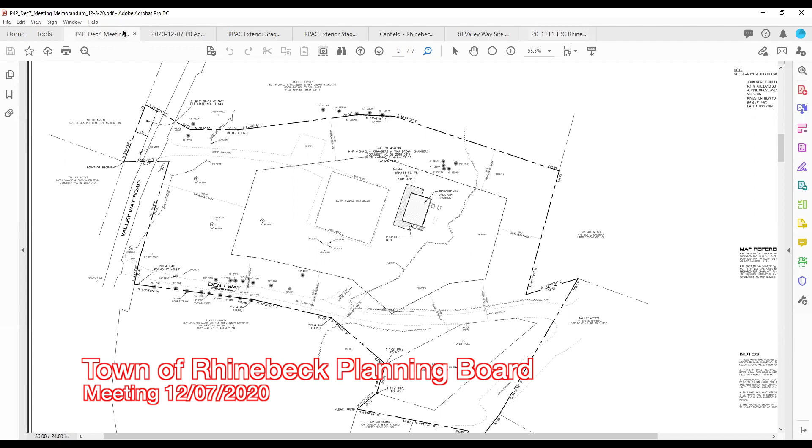Could I hear a motion to approve, please? So moved, Edna. Second, thank you, Sharon. All in favor, please say aye.

Aye. Very good. Okay, you'll get in touch with Sharon and Kathy about the site visit. Yes, thank you.

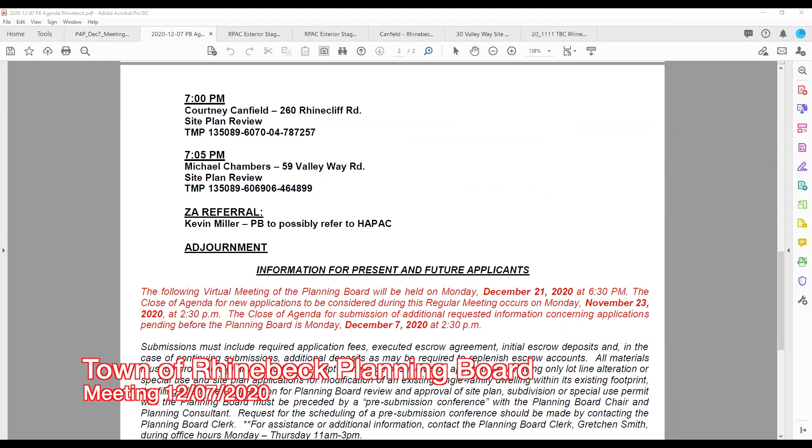Thank you. Okay, we have one more item on the old agenda, which is a referral from our zoning enforcement officer, based upon our new historic structures law, Kevin Miller, to advise whether his application should be referred to the Historic Archaeological Preservation Advisory Committee. I must have sort of missed this one because, let me see, submitted a building permit to reconstruct an existing deck attached to the residence. The property is within the National Historic Landmark District and has been referred to the Planning Board for determination of whether the application should be referred to the RPAC.

Okay. Michael, I put the plans up on here. It appears that the proposal is to replace an existing deck, as far as I can tell.

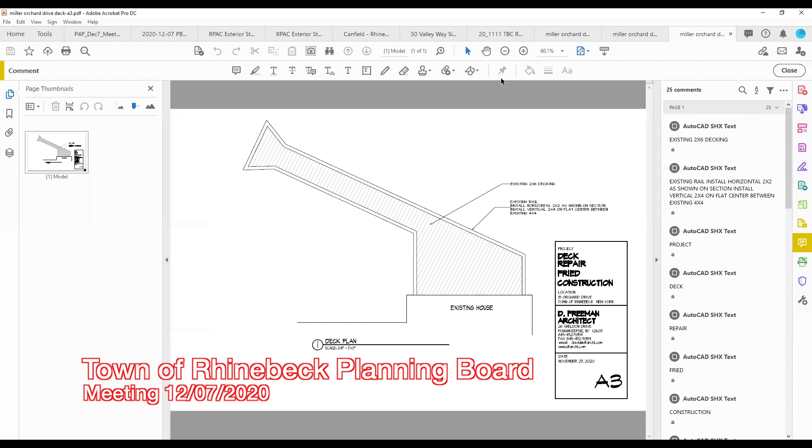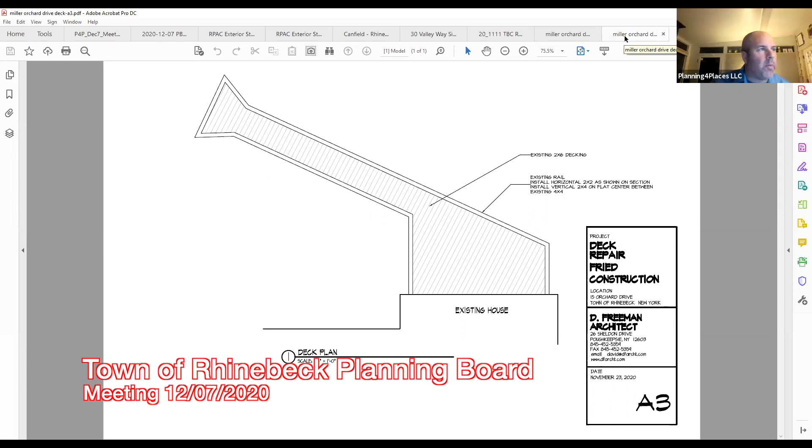If it's not changing, I mean, if it's just replacing an existing deck and there's no additional elevation or changes, I don't really think it needs to be referred. But Kathy, what are your thoughts? I agree, that's exactly what I was about to say. I'll refer it to the committee if you want, but I think that will be the reaction. So this is existing and this is proposed. They're not quite overlapping each other in terms of the scale, but I believe that they're exactly the same footprint. I can't see a reason to refer it. Yeah, and they're even calling it deck repair.

Then I would think, perhaps by consensus, I don't know if we need a resolution, that in the view of the Planning Board, this application does not require referral to the RPAC. Correct, agreed. Could I hear a motion, Kathy? Moved. Could I hear a second? Second. Okay, well, we have a... Kathy did the motion, Sharon did the second. Correct. All right, all in favor, please say aye. Aye. So we will return this resolution to Michelle to let her know we do not believe it needs to be referred to the RPAC.

Great, okay, well, that's all I have on the agenda. Does anyone else have anything else prior to our final meeting of the year on December 21st? No.